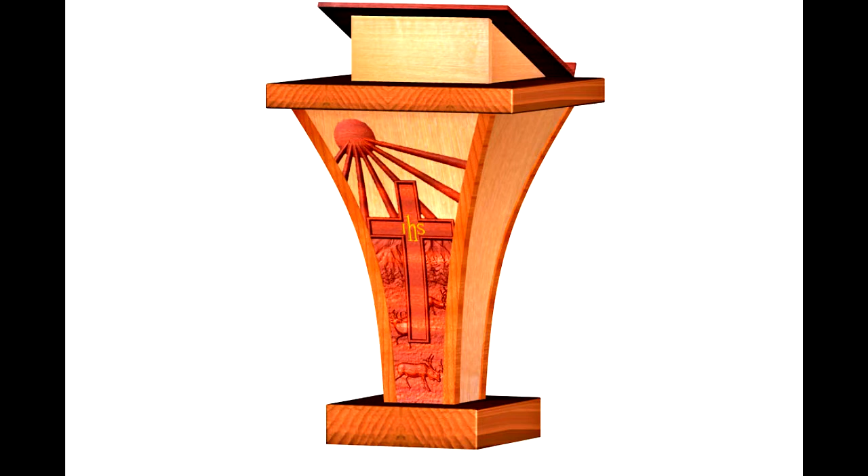So, let's get started. Here's a rendering of the pulpit design, and it was done on Design CAD. And I took the rendering of the carving from Aspire and turned that into a JPEG that then became texture that I could lay onto the model in Design CAD. And that's what you're seeing. Now, making that's a whole nother story.

So I thought of a lot of different ways of doing this, but the one that made the most sense was to carve this on the CNC similarly to the way you carve a bowl. That is, with the bottom being rounded and the inside being rounded, since the front of the pulpit and the altar, for that matter, are curved. And so I'm going to show you how that was done.

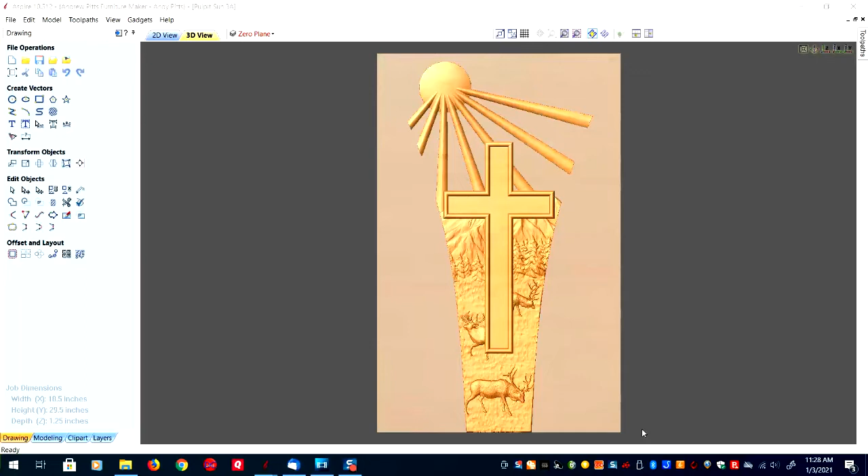Here's the model of the carving that's on the front of the pulpit in Aspire, and you can see that it is flat. And that's how I wanted it to make a rendering that I could then apply to the front of the pulpit model in Design CAD. So I had to figure out how to make that curved.

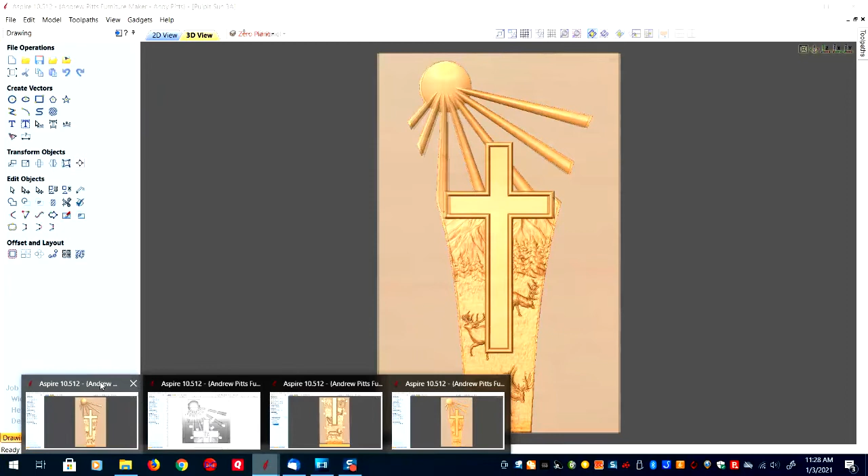So I made this new file, and you can see here that it has a curve on the front and the back. And the way I did that was to use the actual curvature of the front of the pulpit and make a plane that is curved that would become the back of the model here, and then lay the model I had made onto that curved surface to end up getting a curved piece that could be carved two-sided. And so this is what this is.

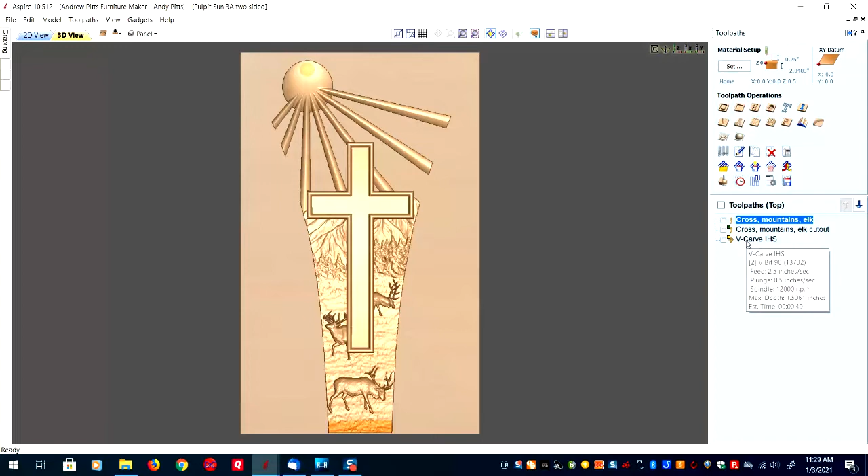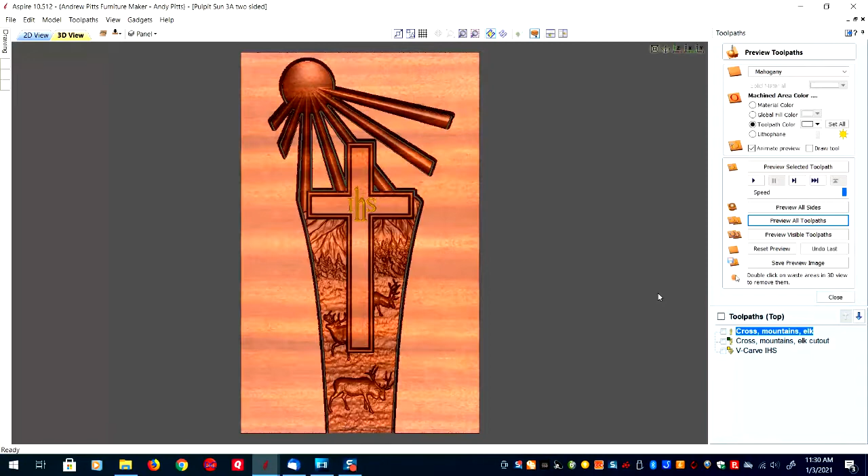And if I show you here how the carving was actually done, there you can see all the tool paths for the front of the piece, and a simulation of the carving. And you can see that right now, because I only carved the front, this is still going to be a flat piece on the back, because I didn't carve the back yet, but you can see how the front is curved.

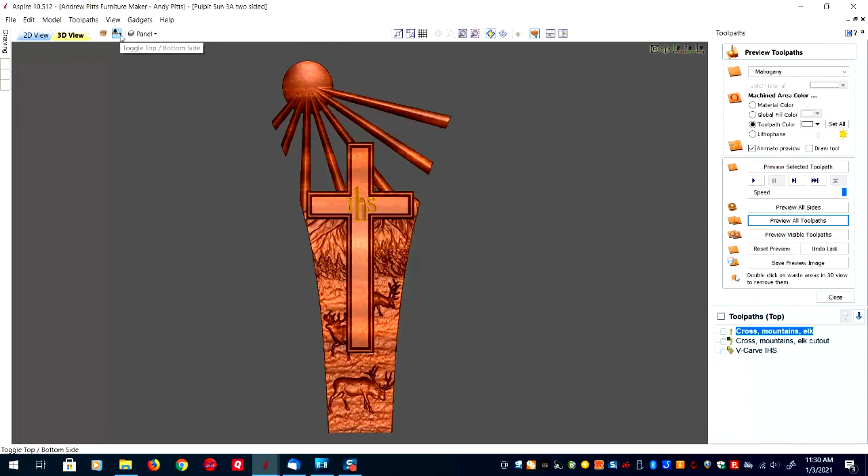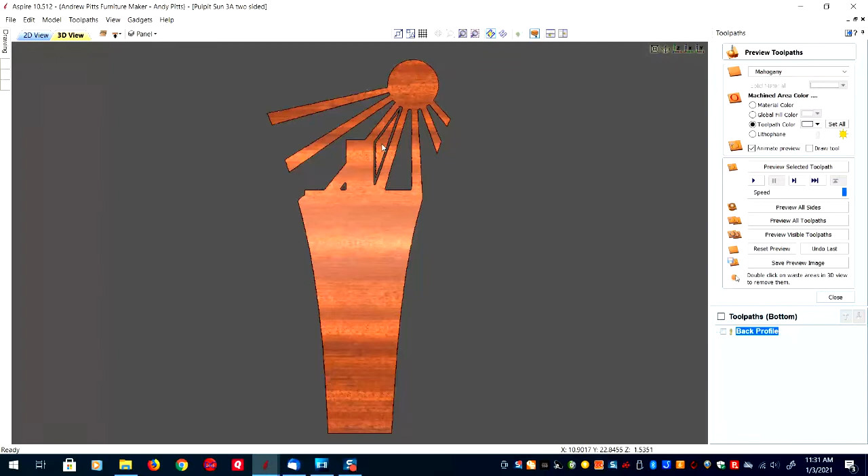So now it's a matter of flipping this over and carving the back, which is just simply a single tool path with a 1/2-inch bit that carves this. And now with that back fully carved, I'll go ahead and get rid of the excess pieces here. And you can see, if I can get this thing to twist right, that the whole thing has a curved back and a curved front. So if I can carve this successfully, I can then apply this with glue to the front of the pulpit.

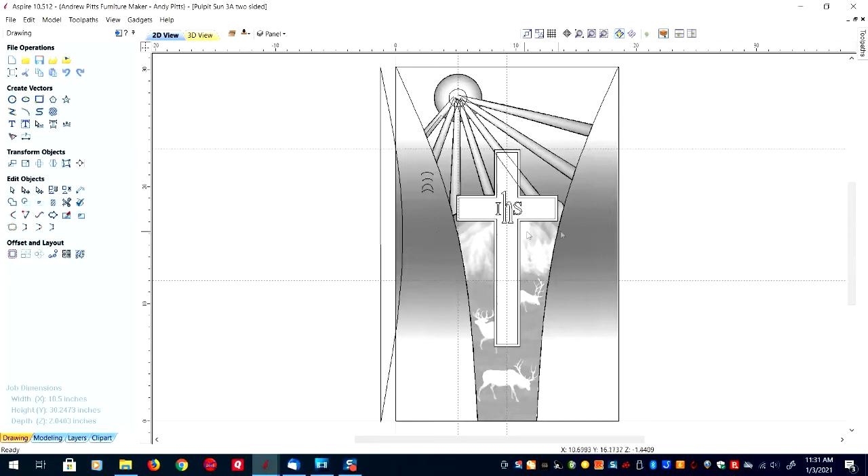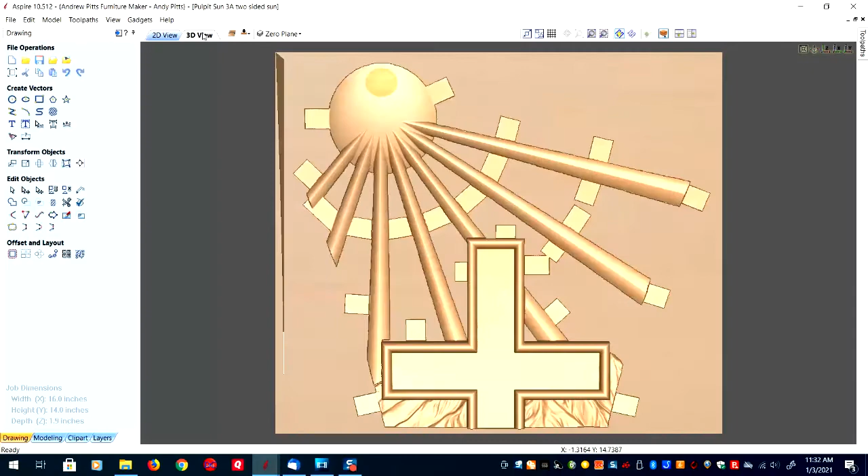Okay, now what I had to figure out is how to fit this thing onto my spoil board, because my machine only has a 24-inch wide by 18-inch tall spoil board. So I decided to cut this into 2 pieces, a top piece and a bottom piece, and then I'd glue them together. So here's the top piece, and you can see those little white rectangles are tabs that hold the waste to the model as I cut through the whole thing so everything doesn't go flying. It's a little difficult to see I guess, but I've got the curved front and the curved back with tabs to hold everything in place. So when I cut this, it should work.

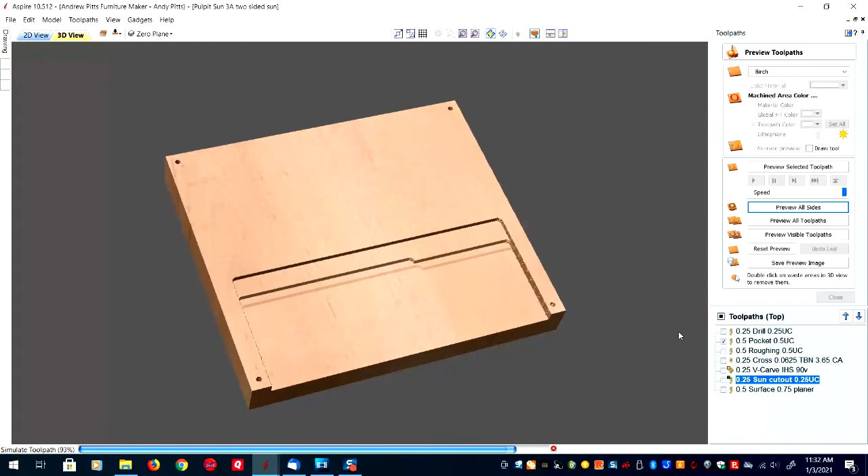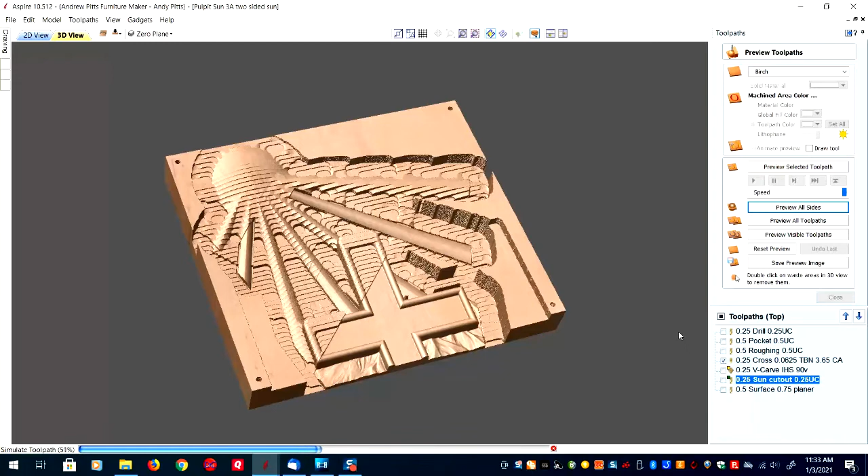And now I'm just going to go ahead and show you the tool paths, and we'll cut this out. I'm cutting away the waste on the front, the rough cut. And for the rough cut, I'm just using a big 1/2-inch bit. And now I'm doing the finish cut with a 1/16 inch ball nose, really small. And I use a 1/16 inch ball nose because this particular piece has a lot of detail, and you'll see that more later on when we do the bottom half.

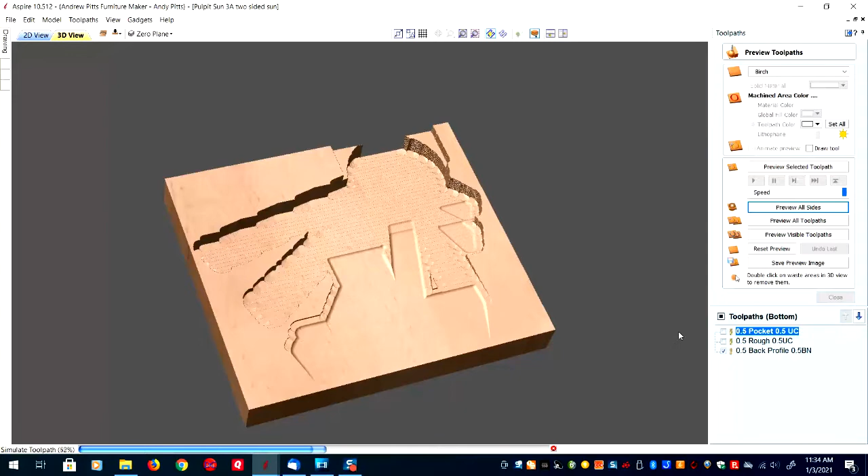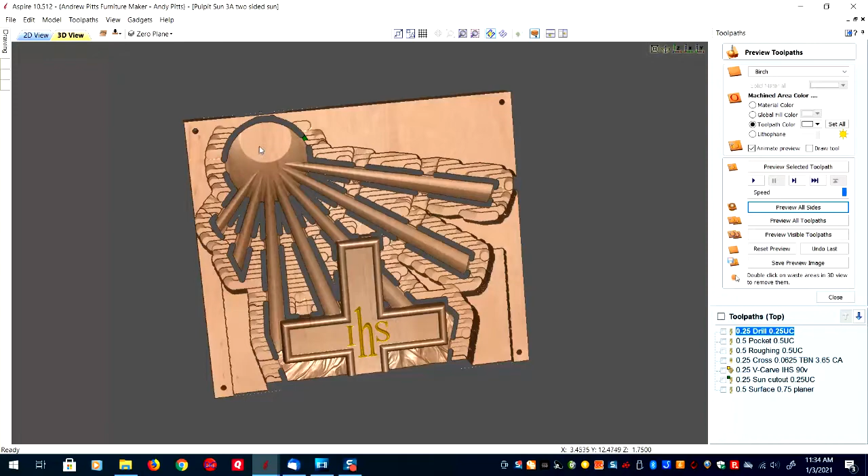Now I'll cut the back because it's got to have the curve as well, and I'm just using big 1/2-inch bits for this. And you can see now that I've got the whole piece cut with tabs in place that I'll have to cut through with a saw and clean it up. But when I do, I'll have just the sun with the rays and the top of the cross and the top of the mountains. Now this blank was not quite thick enough for the entire piece. As a matter of fact, the little top of the sun kind of stuck up out of there, so I had to glue on an extra little block of wood onto that before I cut the front.

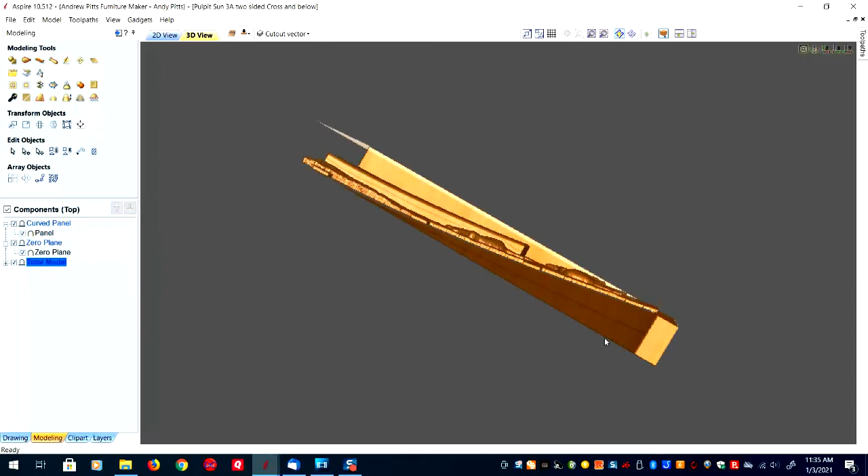So now I'm going to work on the bottom part, and this I think was like 17 inches tall, so it's a pretty large piece. A lot of detail in the elk here, and that's why I had to use the 1/16 inch ball nose bit. But you can see the tabs on there, and it's got the curve, and essentially it's going to be cut the same way that I just cut the top piece.

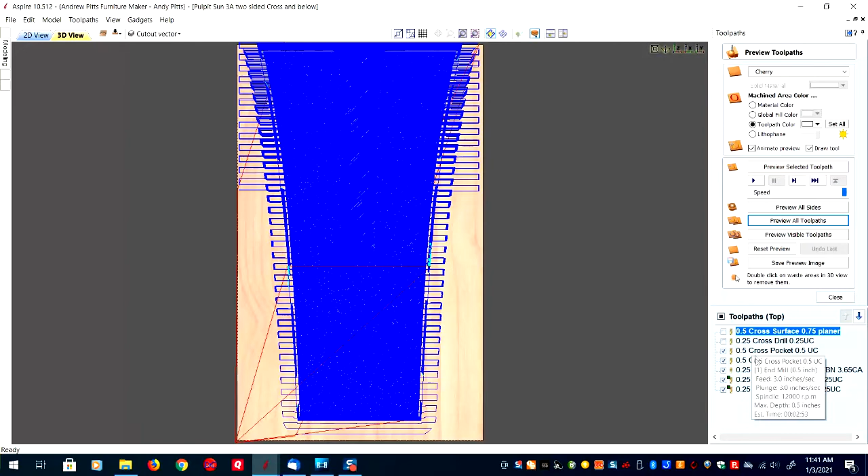Okay, so now I'm going to go ahead and rough out the back. And it's important to leave plenty of material on the sides to support the piece when I flip it over and cut the front. So now I'm cutting the front. First cuts are just to get rid of some of the waste because the bit goes so deep you don't want to hit the collet on the wood, so I have to cut out a little bit ahead of time. Now I'm doing rough cuts. You can start to see the elk form.

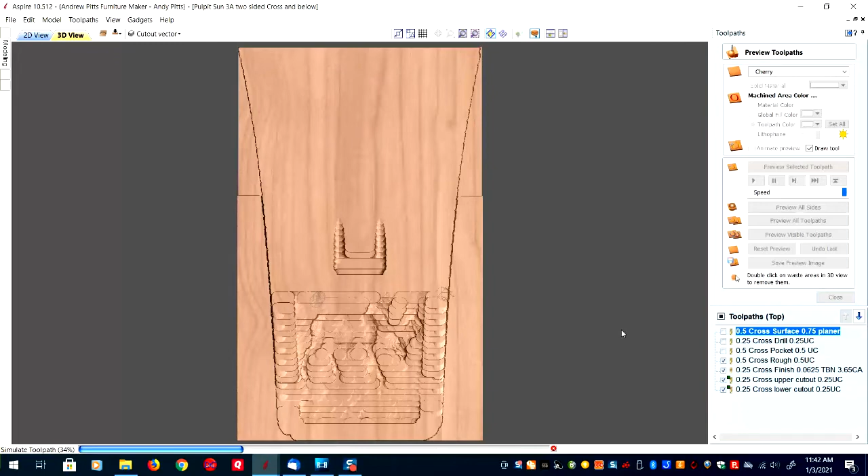Okay, we're pretty much roughed out there, and now I'm coming in with the 1/16 inch ball nose, cutting the detail, really important around those elk. That's one of the reasons I use the 1/16, so I can get the antlers and so forth to really be well defined.

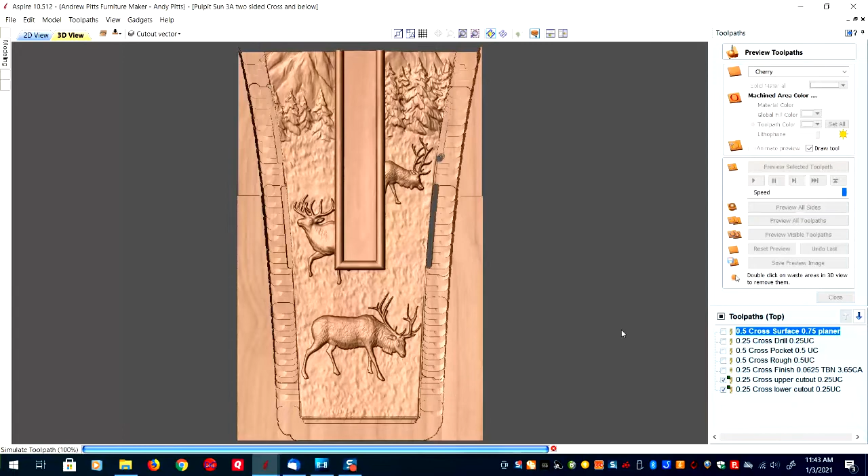So now we're finishing up the finish cutting on the front. We've already got the back cut, so we can go ahead and do the cutout using a 1/4 inch bit. And now all I have to do is cut through those tabs, and I'll have the bottom piece. You can see I've got the curve on the front and the curve on the back. So when I get that cut out, along with the top piece, I can glue them together and we will be done.

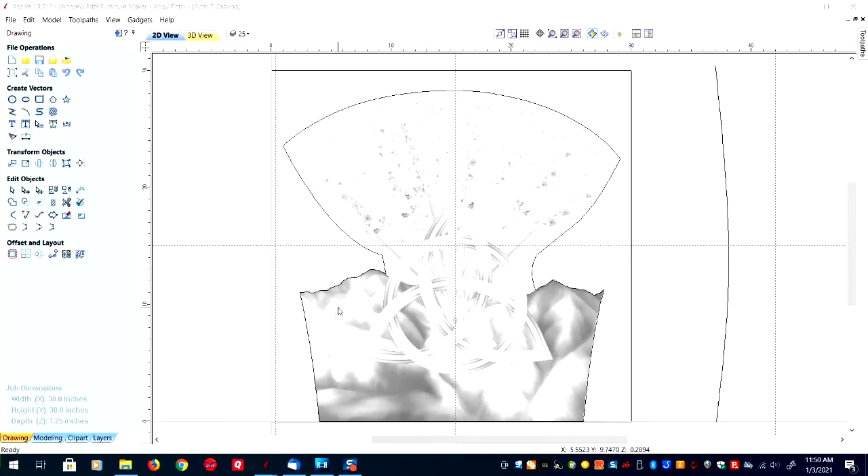Now, the altar piece is a whole nother story. This is big. This had to be done in 4 sections actually. You can see the mountains, you can see the knot for the Trinity, and you can see the lavender. And by the way, this is just to show you that it's flat right now. I've got to still do the curvature on it.

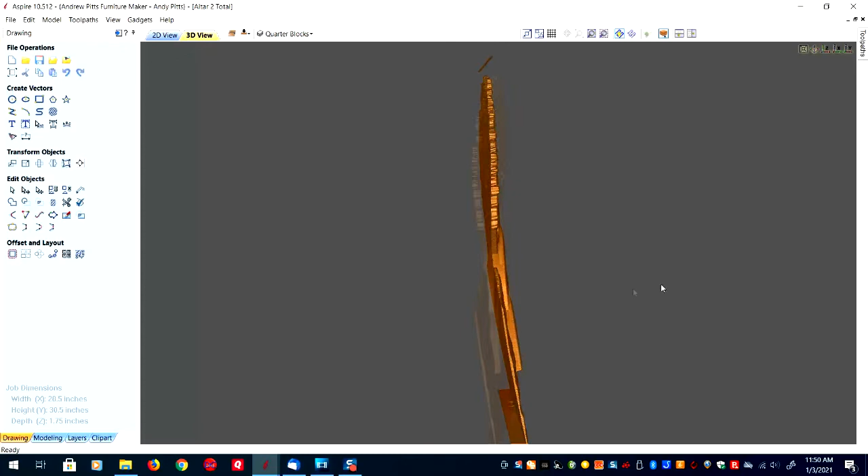But one of the problems was how to support all those lavenders. If I cut through all those things, they're going to be pretty weak. And so I really had to think about that. What I ended up deciding to do was to actually veneer 4 layers of veneer onto the back of this. And those 4 layers of veneer would come to, with the glue, about 90 thousandths of an inch thick. So a little under 1/8 of an inch thick.

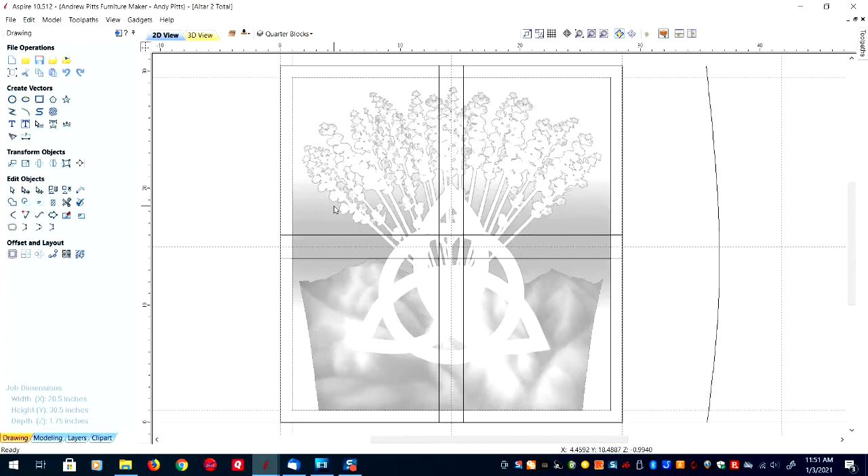And when I actually cut through the lavender, I just make sure I don't cut too far into the veneer. I wanted to cut about 10 or 15 thousandths into the veneer, and that way when you look through the stalks of lavender, you'd actually see oak veneer, and you'd think you're seeing the surface of the actual altar, but in fact you're seeing this oak veneer that I had to add.

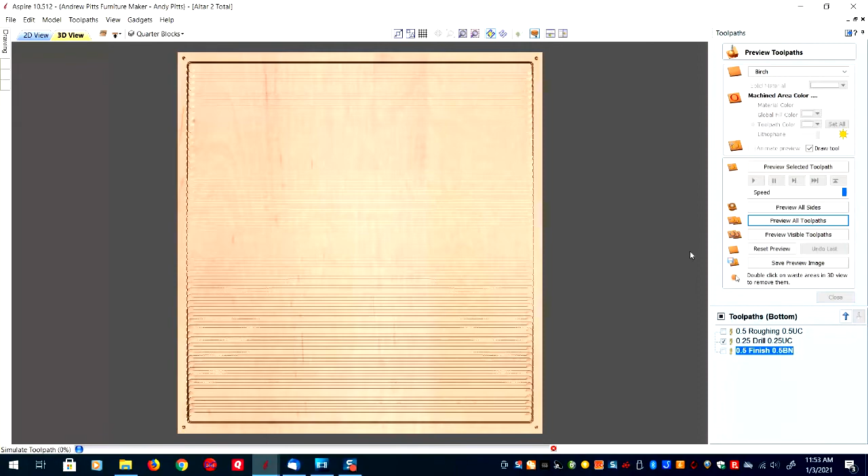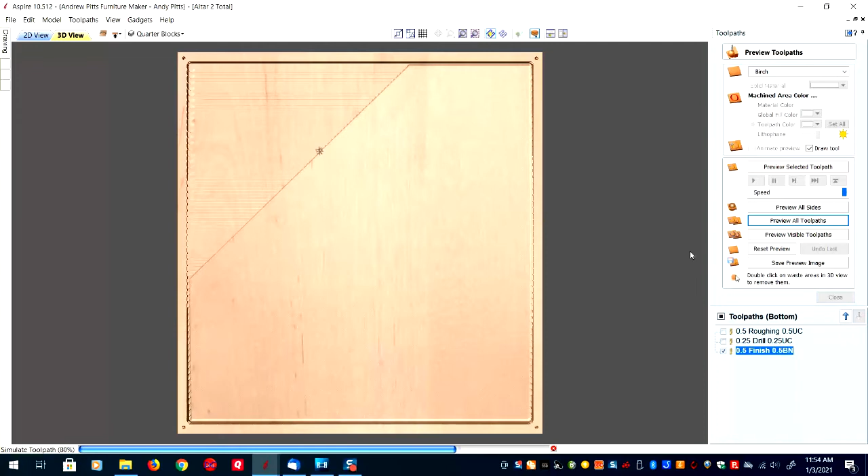So essentially on the back, I was replacing a 90 thousandths inch part of the original cherry with 90 thousandths of oak veneer, and I glued 2 layers of the veneer in the vertical direction and then the back 2 layers in the horizontal direction. The idea being that I wanted to have good strength in both directions, and when I cut through on the front, I wanted to be cutting into vertical grain veneer so it would look just like the underlying veneer on the front of the curved surface of the altar, if that makes any sense to you.

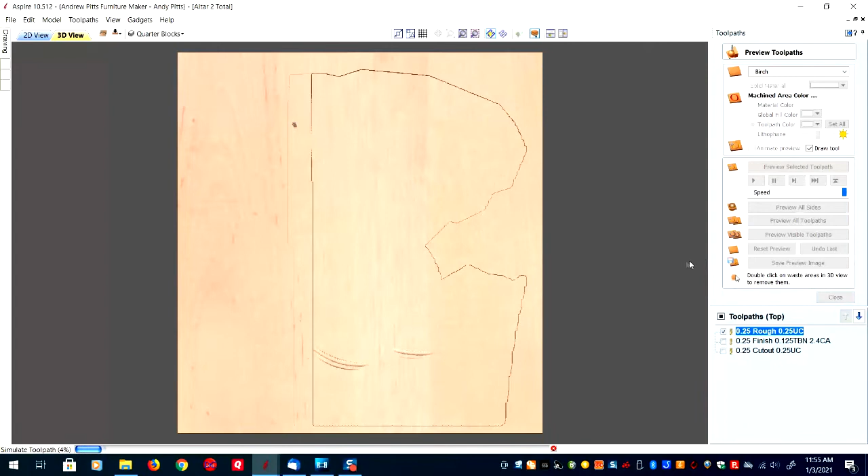And if you look closely, you can kind of see how that back is inset into the piece by 90 thousandths, and the entire surface is 90 thousandths inset from what it would have otherwise been if I had not inserted that extra margin. So with the back cut, I go ahead and then cut the front, or simulate the cut, because remember, what I'm actually going to end up doing is making this in 4 panels because it's just such a large piece. But just to show you how this works, I'll cut through the whole thing, and there's the finished cut.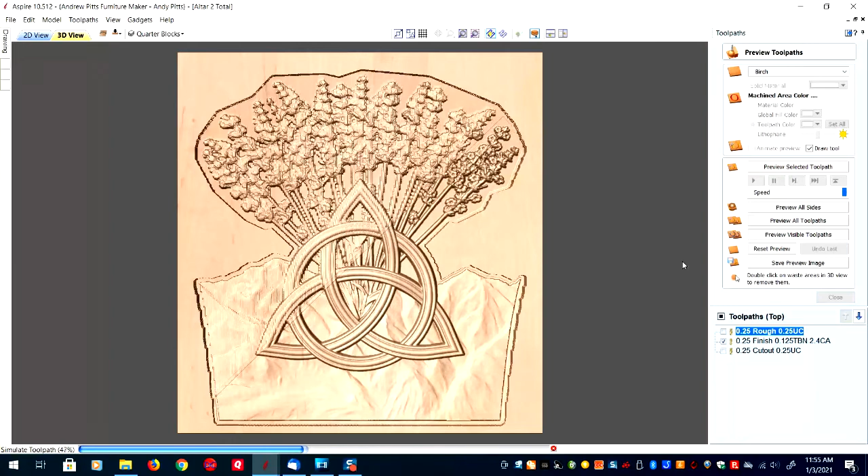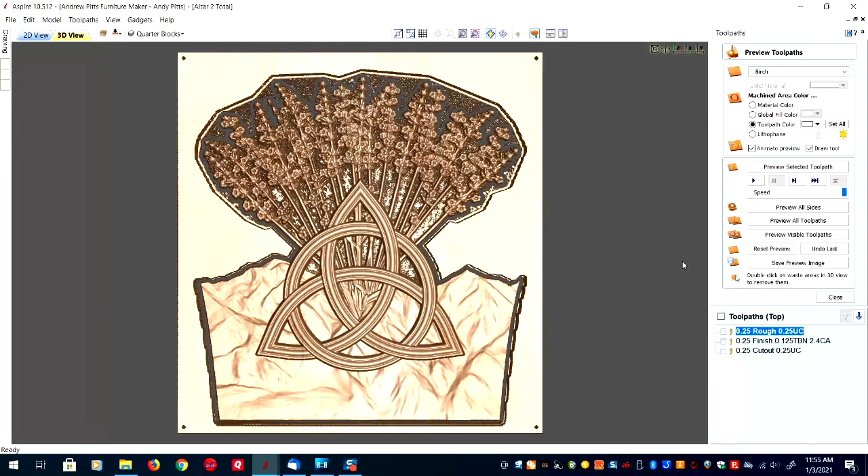Now in this one I'm only using a 1/8 inch ball nose, because believe it or not, the detail on the lavender is not as great as the detail I had on the elk on the last piece. So there you can see the full cut through there. And I'm curved on the back and in the front. And we're recessed to 90 thousandths of an inch. So theoretically this is working.

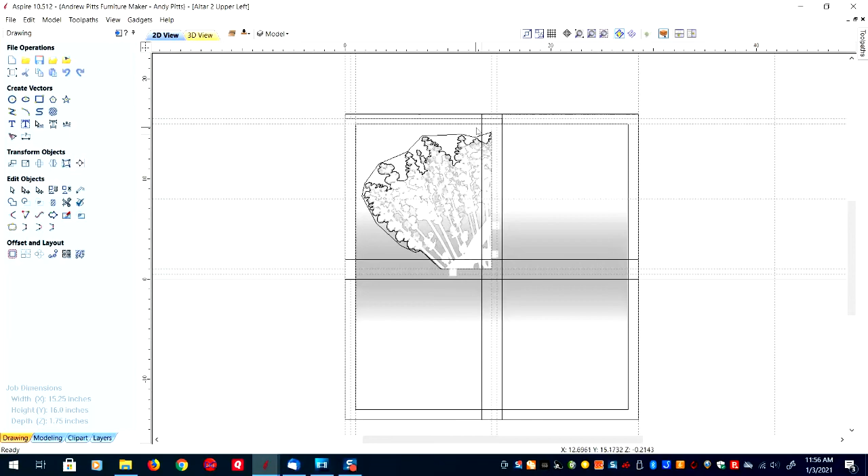Okay, now I'll go ahead and show you how I cut this into quarters. I took the full model and just basically made 4 quarters of the thing and put tabs on to hold it to the frame just like normal. But if I cut these 4 quarters, I can later then glue them together. Remember, on that lavender part, you're not looking through and seeing air on the other side. You're seeing actually the top of that veneer layer that I put on there. So it'll make a very stiff unit.

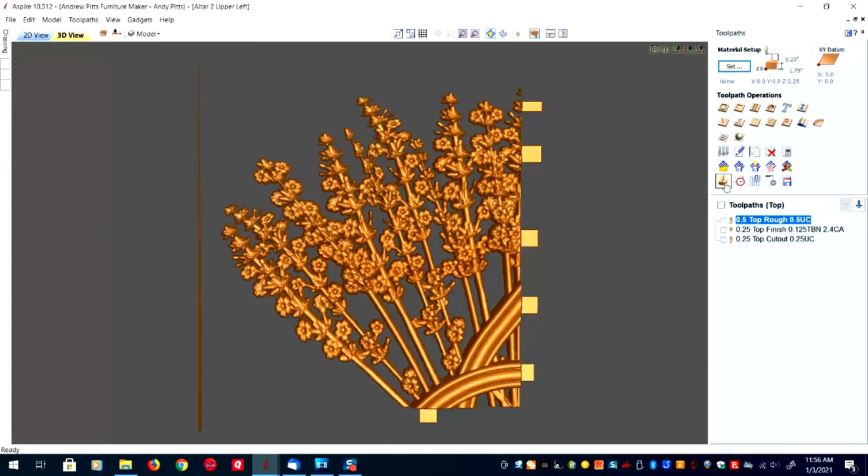So here's the cutout. I'm not showing the tool this time. It's a little faster if I don't do that. But I'm cutting through. I just cut the rough. And now I'm cutting the finish. Now I'm cutting the back. In fact, what I actually did to make this, I cut the back, then I veneered in the vacuum bag, and then I came back and cut the front. So I'm showing you things a little bit out of order here, but you'll get the idea when you see the later clips of the actual construction.

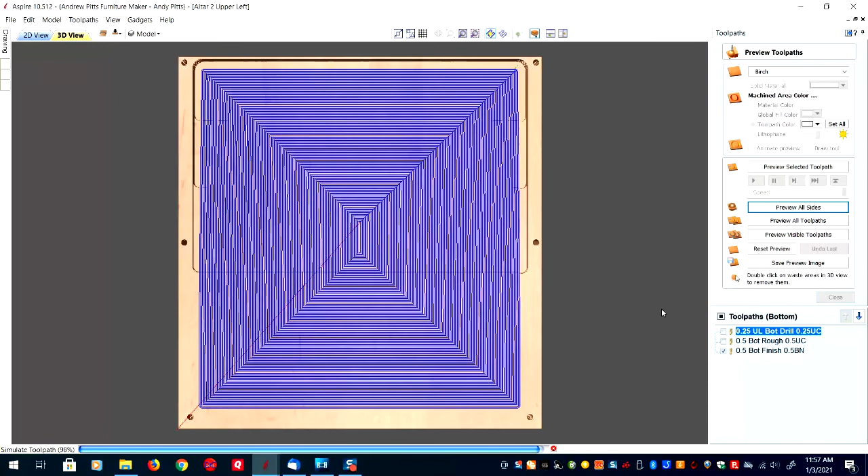And there we go. I've got tabs there that all I have to do is go saw through and clean up, and this piece will fit together with the matching upper right and lower left and lower right pieces.